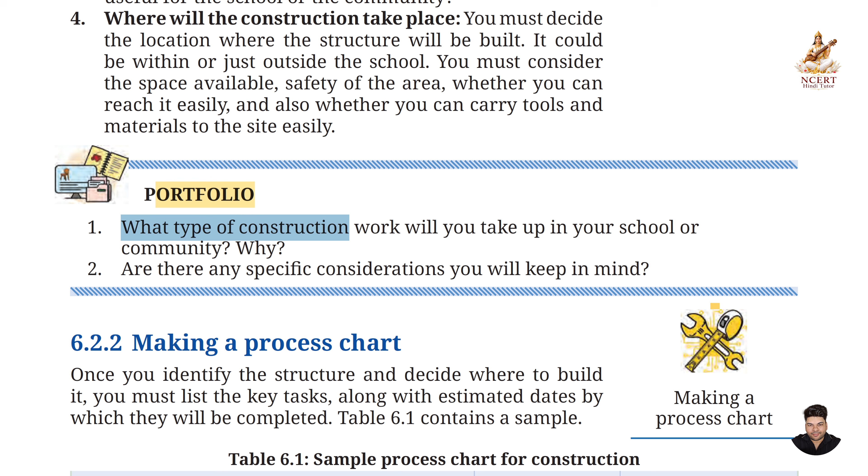Portfolio page 95, Question 1: What type of construction work will you take up in your school or community? Why? Answer: I would like to take up construction of a small boundary wall or flower bed in my school. I would choose this work because it is useful, simple, and suitable for students under the guidance of a teacher or expert.

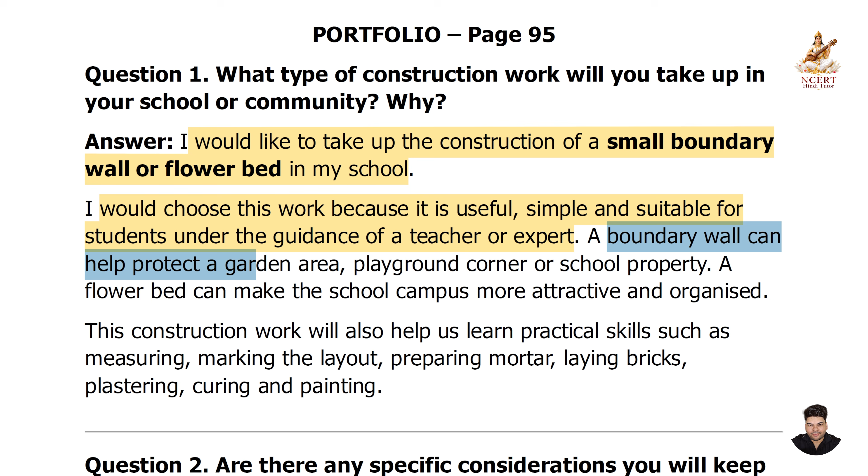A boundary wall can help protect a garden area, playground corner, or school property. A flower bed can make the school campus more attractive and organized. This construction work will also help us learn practical skills such as measuring, marking the layout, preparing mortar, laying bricks, plastering, curing, and painting.

Question 2: Are there any specific considerations you will keep in mind? Answer: Yes, I will keep the following considerations in mind.

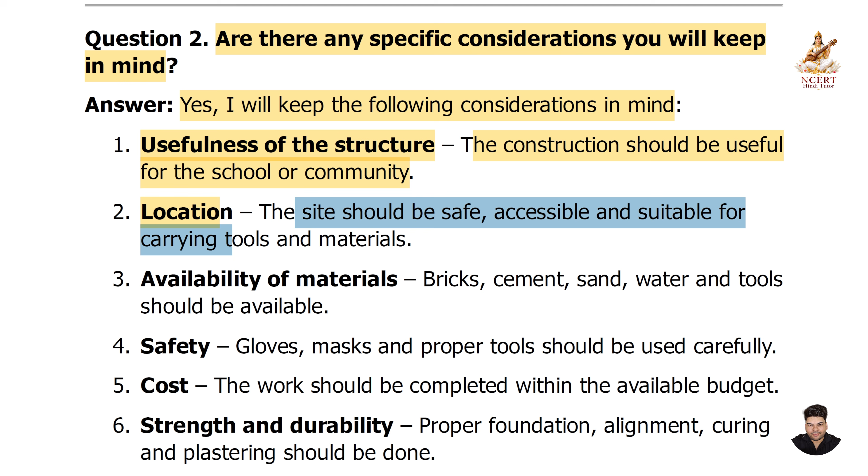First, usefulness of the structure - the construction should be useful for the school or community. Second, location - the site should be safe, accessible, and suitable for carrying tools and materials. Third, availability of materials - bricks, cement, sand, water, and tools should be available.

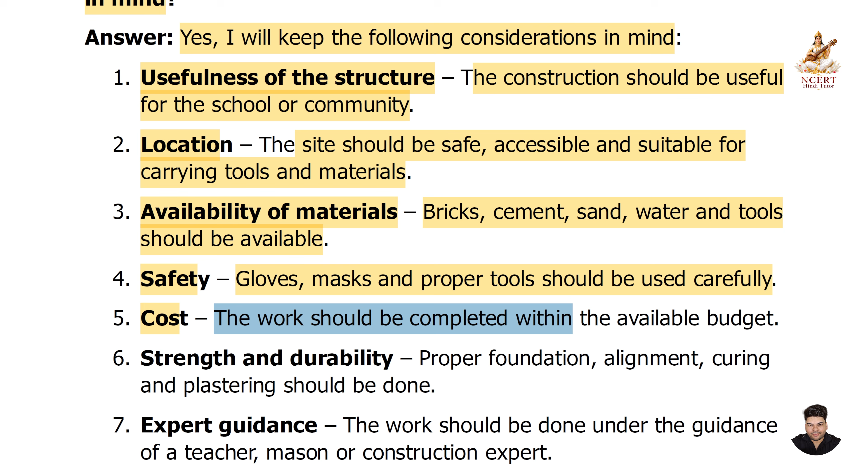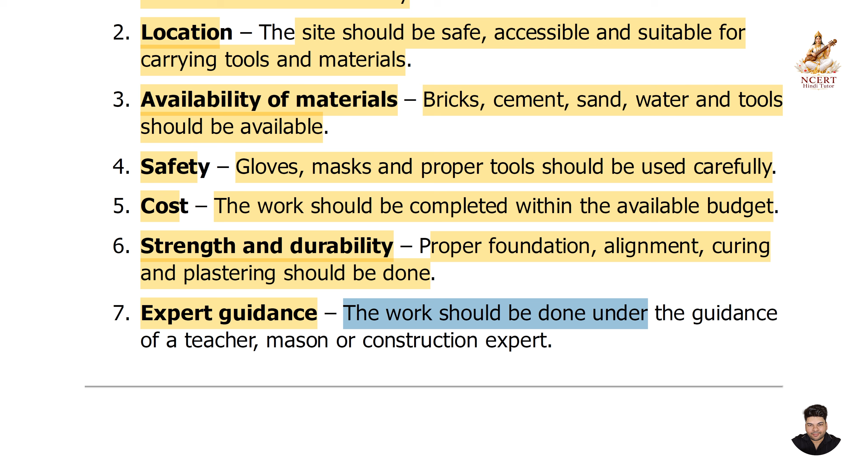Fourth, safety - gloves, masks, and proper tools should be used carefully. Fifth, cost - the work should be completed within the available budget. Sixth, strength and durability - proper foundation, alignment, curing, and plastering should be done. Seventh, expert guidance - the work should be done under the guidance of a teacher, mason, or construction expert.

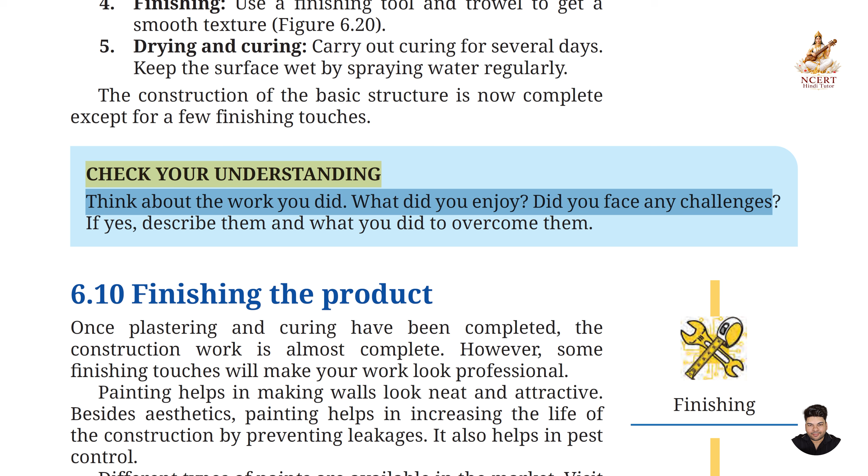Check your understanding, page 109. Think about the work you did. What did you enjoy? Did you face any challenges? If yes, describe them and what you did to overcome them.

Answer: I enjoyed learning how construction work is planned and carried out step by step. I liked measuring the site, marking the layout, mixing cement and sand, and observing how bricks are laid using mortar.

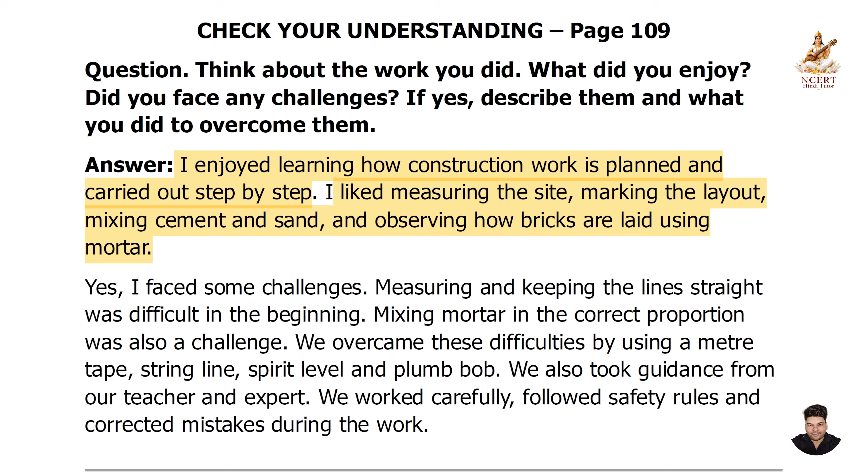Yes, I faced some challenges. Measuring and keeping the lines straight was difficult in the beginning. Mixing mortar in the correct proportion was also a challenge. We overcame these difficulties by using a meter tape, string line, spirit level, and plumb bob.

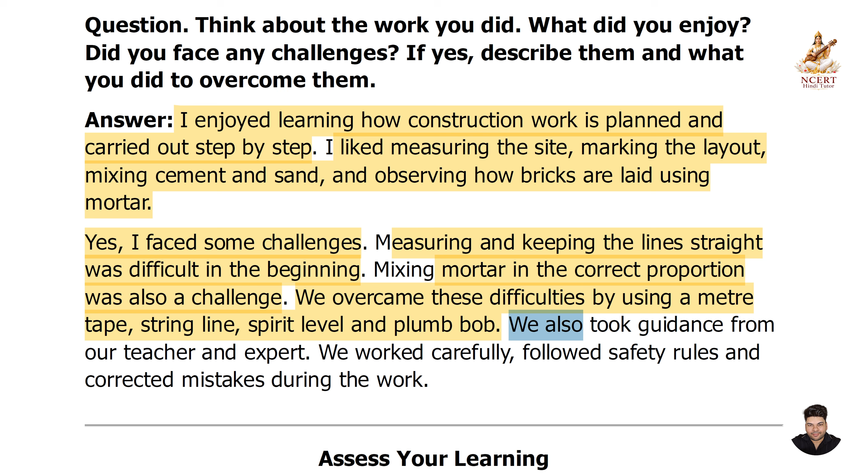We also took guidance from our teacher and expert. We worked carefully, followed safety rules, and corrected mistakes during the work.

Next, assess your learning. Question 1: Look around your school or neighborhood and identify any one structure. Identify the basic structural elements - foundation, walls, roof, beams, or columns - that you can observe and describe their functions.

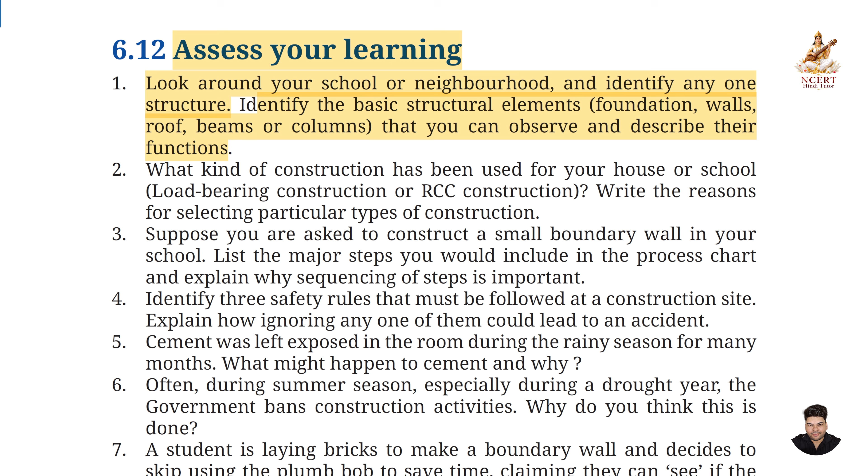Answer: One structure I can identify in my school is a classroom building. The basic structural elements are: foundation - the foundation is below the ground, it supports the whole building and transfers the load safely to the soil, and it helps prevent cracks and increases the life of the building.

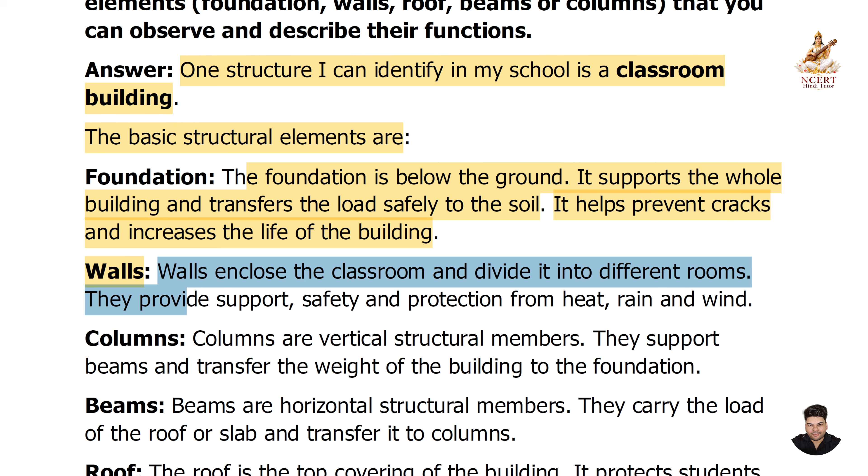Next, walls. Walls enclose the classroom and divide it into different rooms. They provide support, safety, and protection from heat, rain, and wind.

Next, columns. Columns are vertical structural members. They support beams and transfer the weight of the building to the foundation.

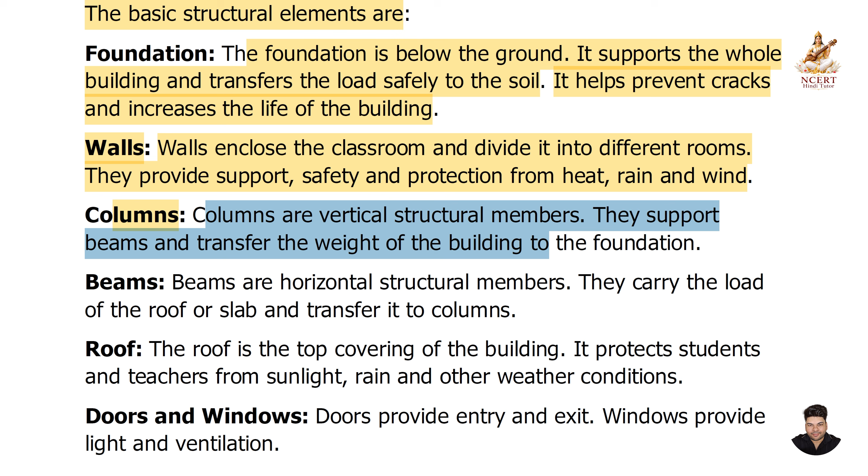Next, beams. Beams are horizontal structural members. They carry the load of the roof or slab and transfer it to columns.

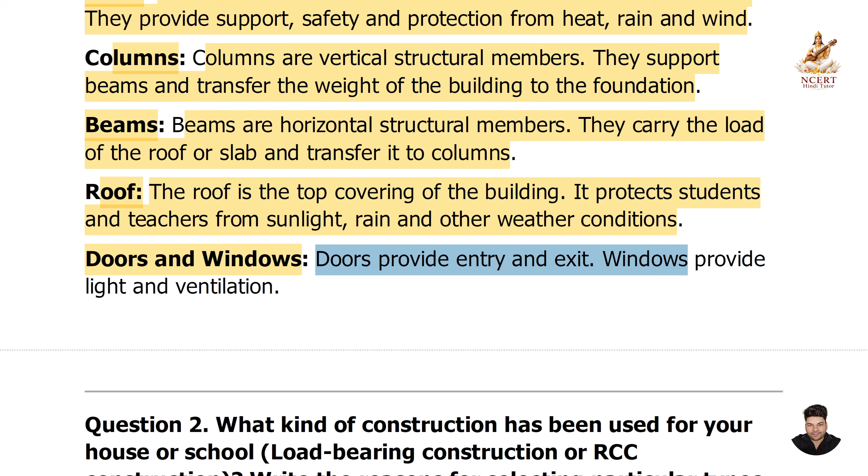Next, roof. The roof is the top covering of the building. It protects students and teachers from sunlight, rain, and other weather conditions. Doors and windows: doors provide entry and exit, windows provide light and ventilation.

Question 2: What kind of construction has been used for your house or school - load bearing construction or RCC construction? Write the reasons for selecting particular types of construction.

Answer: My school building is most likely made using RCC construction. In RCC construction, the building stands on a strong frame of columns and beams made of reinforced cement concrete. The load of the roof, slab, and upper floors is carried by the RCC frame and transferred to the foundation.

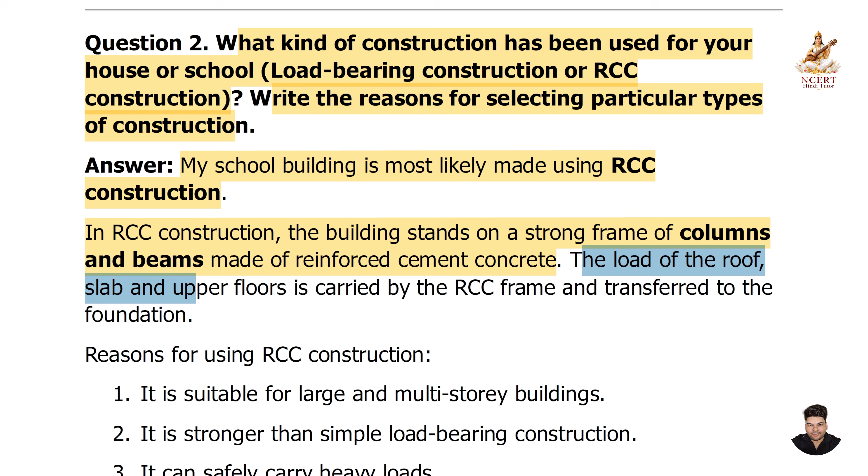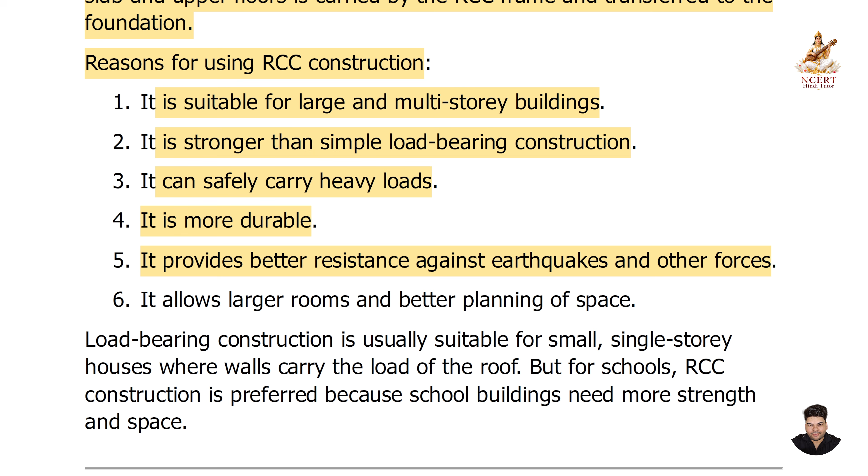Reasons for using RCC construction: it is suitable for large and multi-story buildings, it is stronger than simple load-bearing construction, it can safely carry heavy loads, it is more durable, it provides better resistance against earthquakes and other forces, and it allows larger rooms and better planning of space.

Load-bearing construction is usually suitable for small, single-story houses where walls carry the load of the roof.

But for schools, RCC construction is preferred because school buildings need more strength and space.

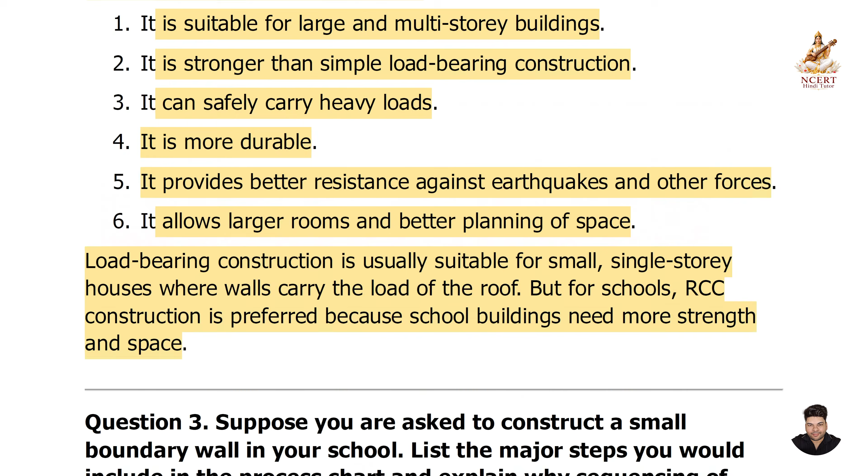Question 3: Suppose you are asked to construct a small boundary wall in your school. List the major steps you would include in the process chart and explain why sequencing of steps is important.

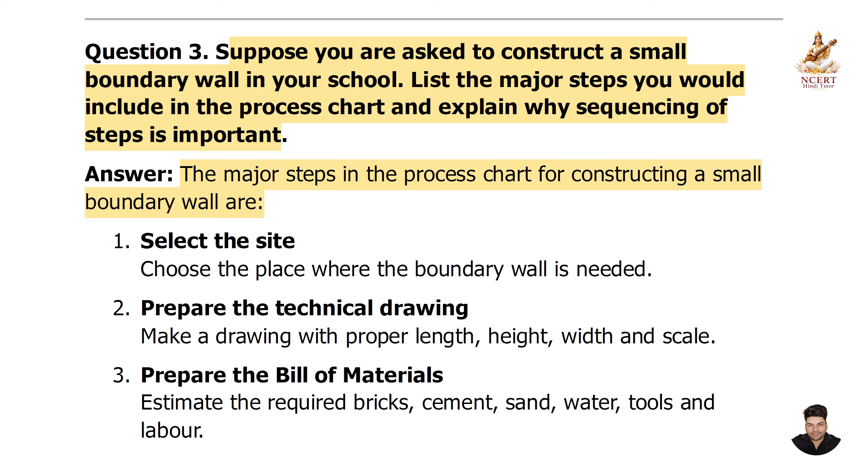Answer: The major steps in the process chart for constructing a small boundary wall are: first, select the site, choosing the place where the boundary wall is needed. Second, prepare the technical drawing, making a drawing with proper length, height, width, and scale. Third, prepare the bill of materials, estimating the required bricks, cement, sand, water, tools, and labor.

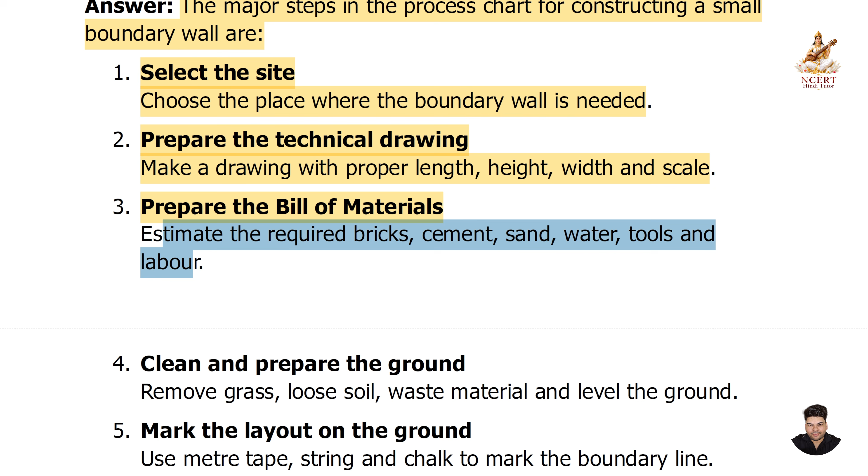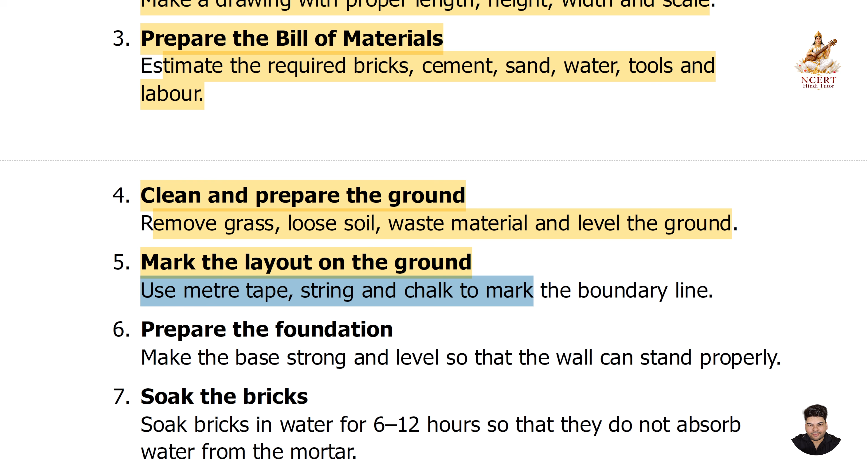Fourth, clean and prepare the ground, removing grass, loose soil, waste material, and leveling the ground. Fifth, mark the layout on the ground using meter tape, string, and chalk to mark the boundary line. Sixth, prepare the foundation, making the base strong and level so that the wall can stand properly.

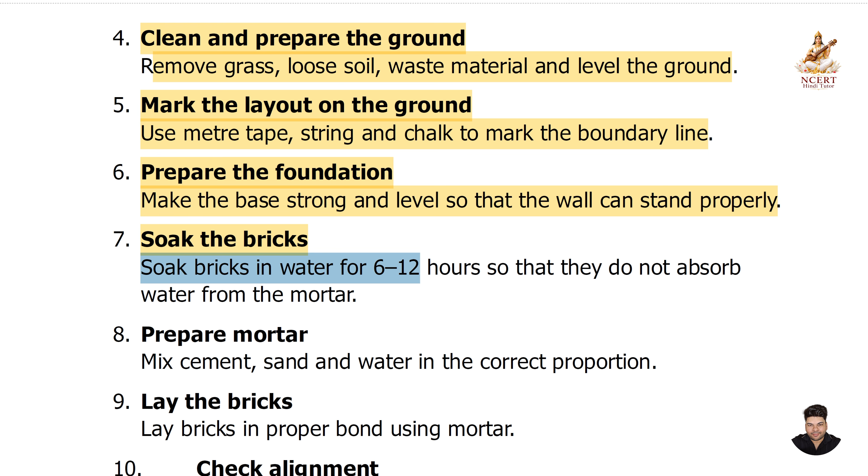Seventh, soak the bricks in water for 6 to 12 hours so that they do not absorb water from the mortar. Eighth, prepare mortar by mixing cement, sand, and water in the correct proportion.

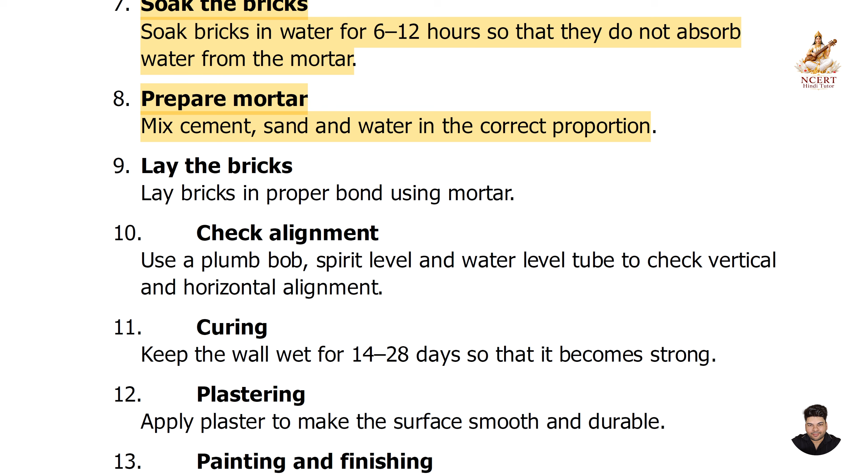Ninth, lay the bricks in proper bond using mortar. Tenth, check alignment using a plumb bob, spirit level, and water level tube to check vertical and horizontal alignment. Eleventh, curing: keep the wall wet for 14 to 28 days so that it becomes strong.

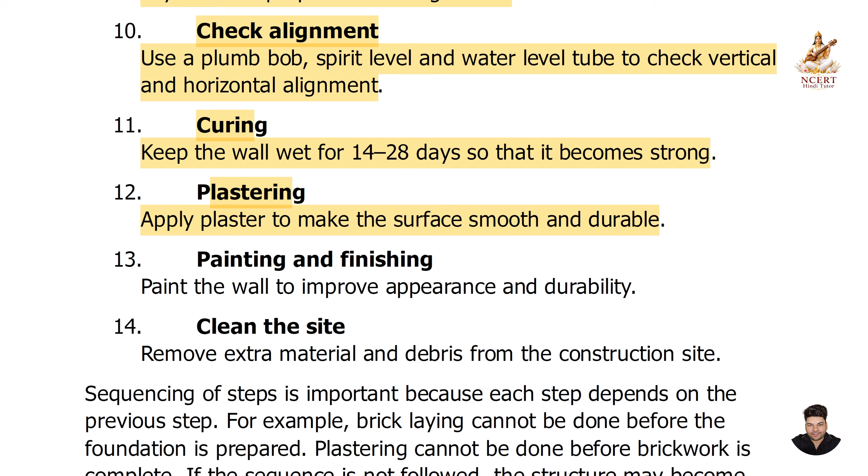Twelfth, plastering: apply plaster to make the surface smooth and durable. Thirteenth, painting and finishing: paint the wall to improve appearance and durability. Fourteenth, clean the site: remove extra material and debris from the construction site.

Sequencing of steps is important because each step depends on the previous step. For example, bricklaying cannot be done before the foundation is prepared, and plastering cannot be done before brickwork is complete. If the sequence is not followed, the construction may become weak, uneven, unsafe, or incomplete.

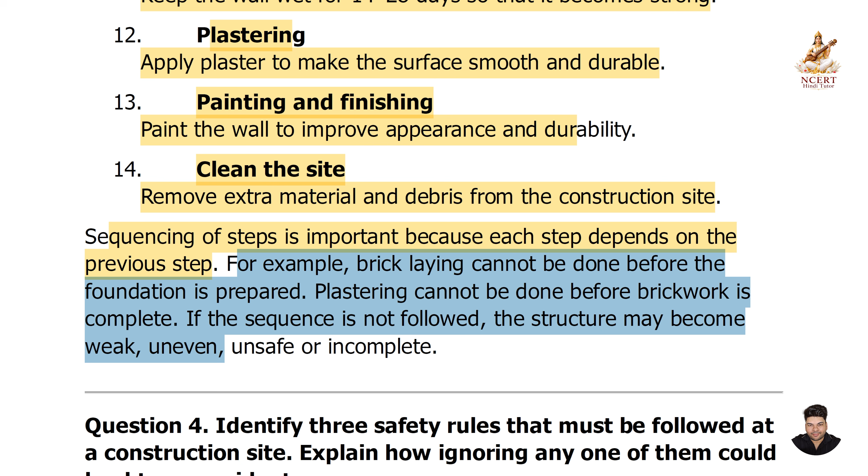Question 4: Identify 3 safety rules that must be followed at a construction site. Explain how ignoring any one of them could lead to an accident.

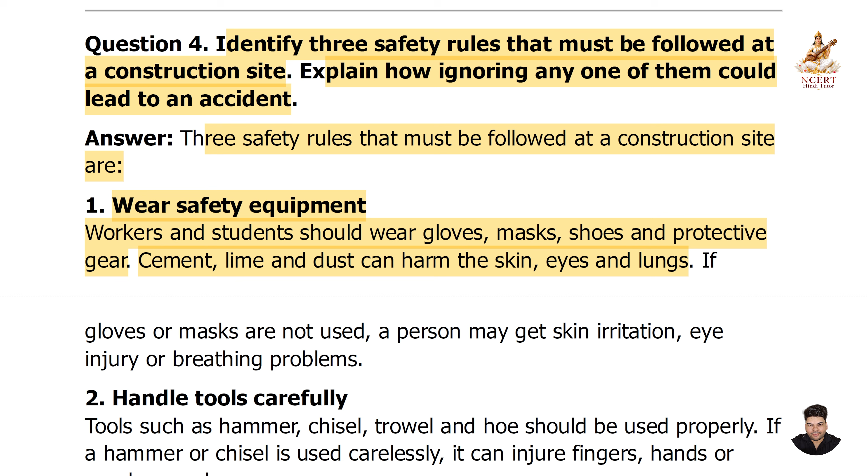Answer: The 3 safety rules that must be followed at a construction site are: first, wear safety equipment. Workers and students should wear gloves, masks, shoes, and protective gear, since cement, lime, and dust can harm the skin, eyes, and lungs. If gloves or masks are not used, a person may get skin irritation, eye injury, or breathing problems.

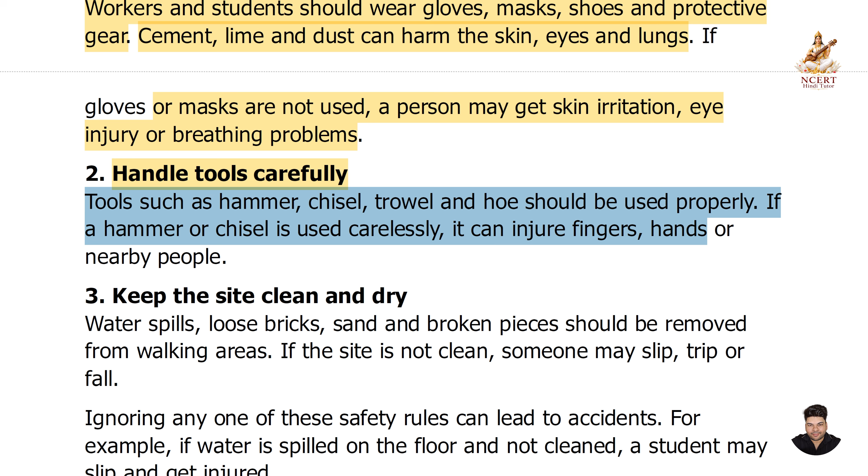Second, handle tools carefully. Tools such as hammer, chisel, trowel, and hoe should be used properly. If a hammer or chisel is used carelessly, it can injure fingers, hands, or nearby people.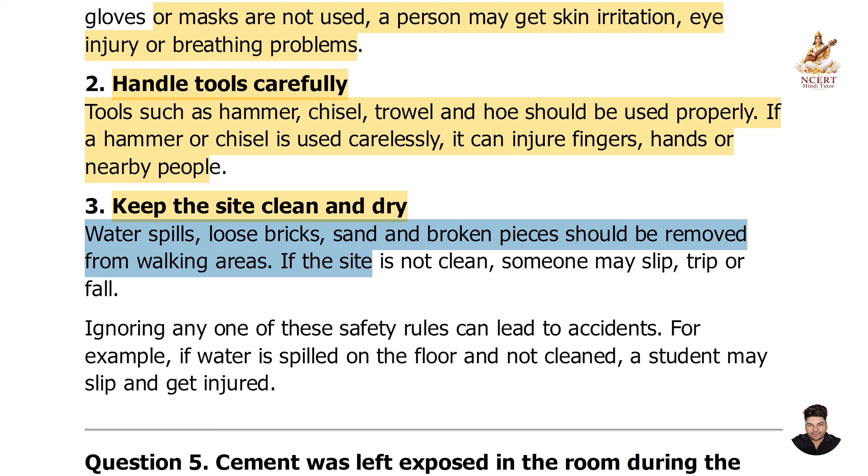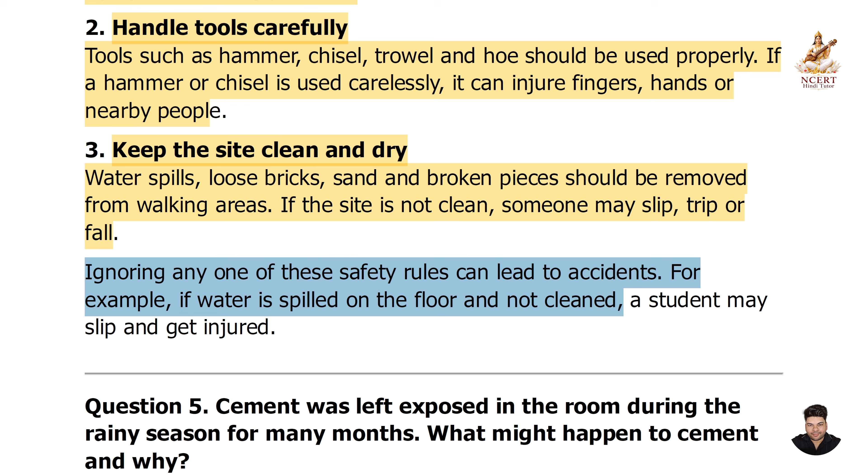Third, keep the site clean and dry. Water spills, loose bricks, sand, and broken pieces should be removed from walking areas. If the site is not clean, someone may slip, trip, or fall. Ignoring any one of these safety rules can lead to accidents. For example, if water is spilled on the floor and not cleaned, a student may slip and get injured.

Question 5: Cement was left exposed in the room during the rainy season for many months. What might happen to cement and why?

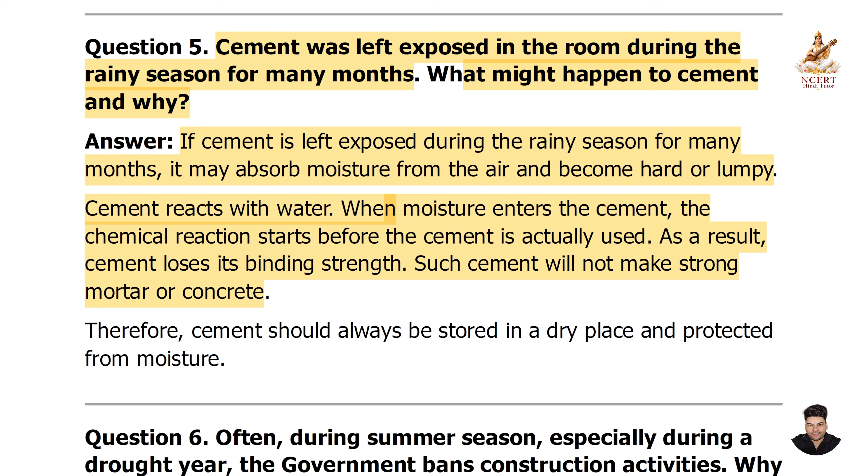Answer: If cement is left exposed during the rainy season for many months, it may absorb moisture from the air and become hard or lumpy. Cement reacts with water; when moisture enters the cement, the chemical reaction starts before the cement is actually used. As a result, cement loses its binding strength, and such cement will not make strong mortar or concrete. Therefore, cement should always be stored in a dry place and protected from moisture.

Question 6: Often during summer season, especially during a drought year, the government bans construction activities. Why do you think this is done?

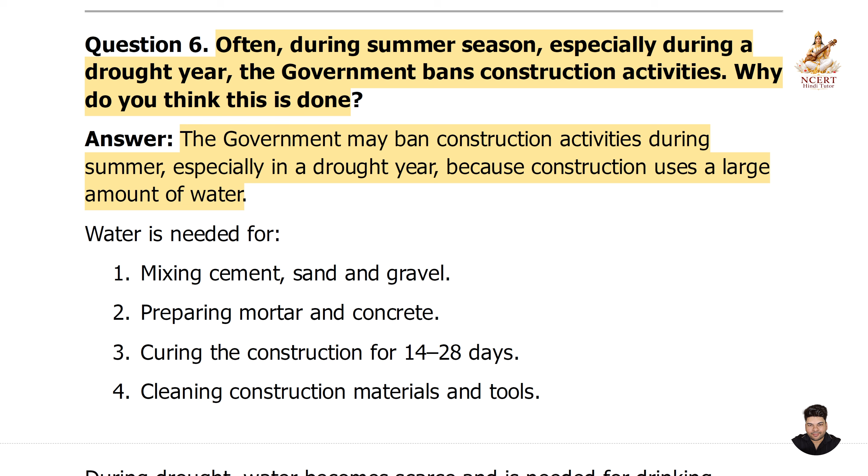Answer: The government may ban construction activities during summer, especially in a drought year, because construction uses a large amount of water. Water is needed for mixing cement, sand, and gravel; preparing mortar and concrete; curing the construction for 14 to 28 days; and cleaning construction materials and tools.

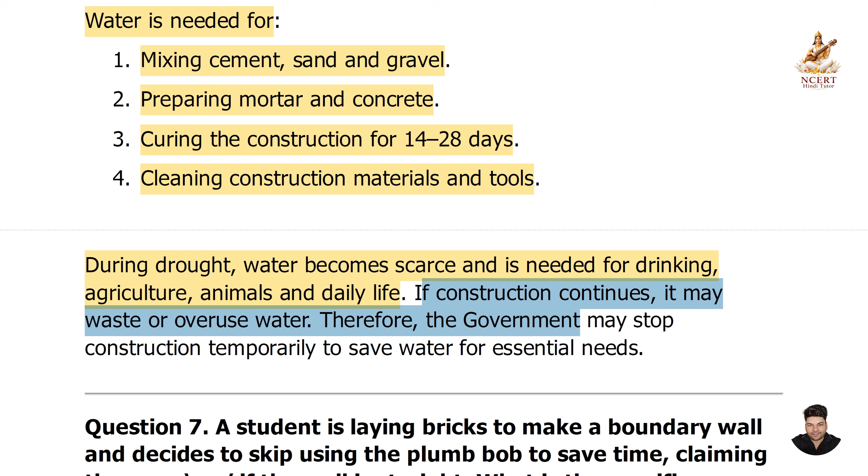During drought, water becomes scarce and is needed for drinking, agriculture, animals, and daily life. If construction continues, it may waste or overuse water. Therefore, the government may stop construction temporarily to save water for essential needs.

Question 7. A student is laying bricks to make a boundary wall and decides to skip using the plumb bob to save time, claiming they can see if the wall is straight. What is the specific technical risk of relying on visual estimation instead of a plumb bob? If the wall is even slightly out of plumb, not perfectly vertical, how might this affect the building's safety over the years?

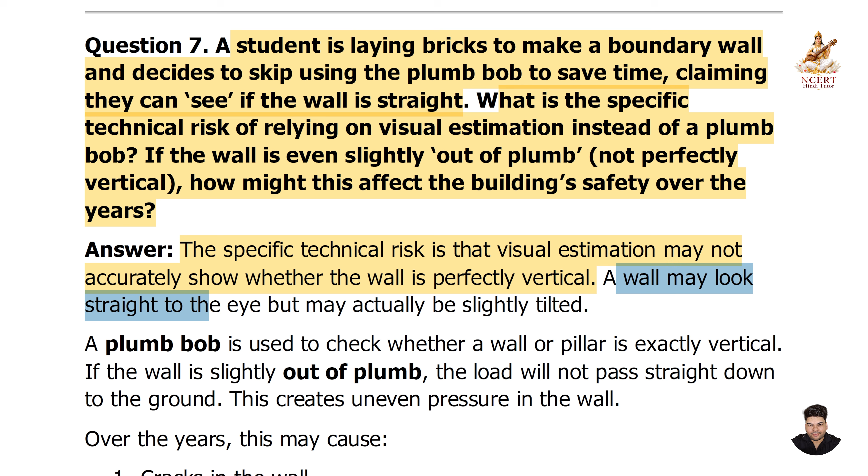Answer: the specific technical risk is that visual estimation may not accurately show whether the wall is perfectly vertical. A wall may look straight to the eye but may actually be slightly tilted. A plumb bob is used to check whether a wall or pillar is exactly vertical.

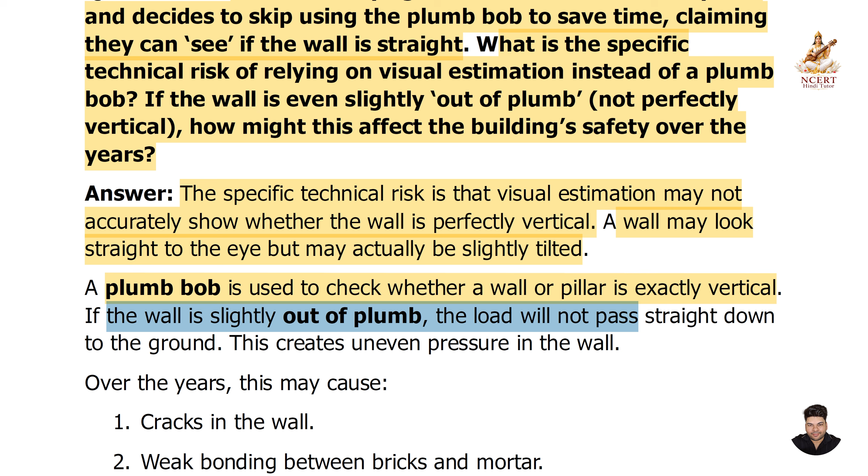If the wall is slightly out of plumb, the load will not pass straight down to the ground. This creates uneven pressure in the wall. Over the years, this may cause cracks in the wall, weak bonding between bricks and mortar, leaning of the wall, reduced stability of the structure, and risk of collapse during heavy rain, wind, or vibration. Therefore, using a plumb bob is important for accuracy, strength, and safety.

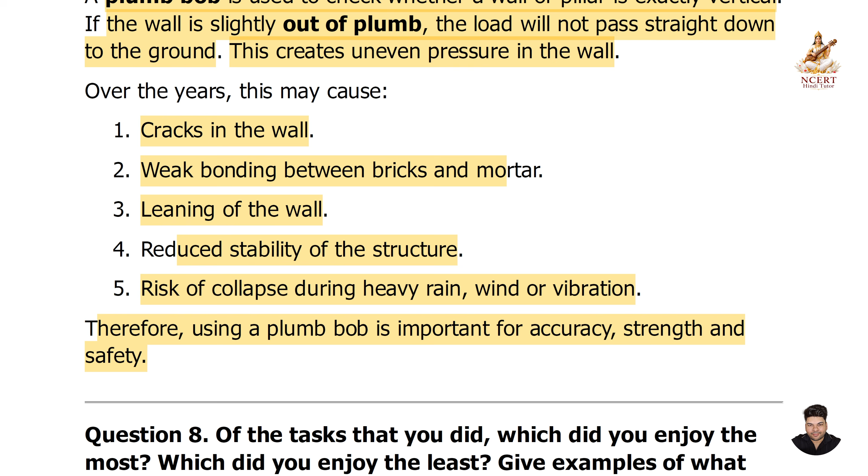Question 8. Of the tasks that you did, which did you enjoy the most? Which did you enjoy the least? Give examples of what went well and what did not go well. What would you do differently next time?

Answer: I enjoyed marking the layout and laying bricks the most because these activities helped me understand how a structure begins to take shape. I also liked using tools like the metre tape, string line, and trowel. I enjoyed mixing mortar the least because it required the correct proportion of cement, sand, and water.

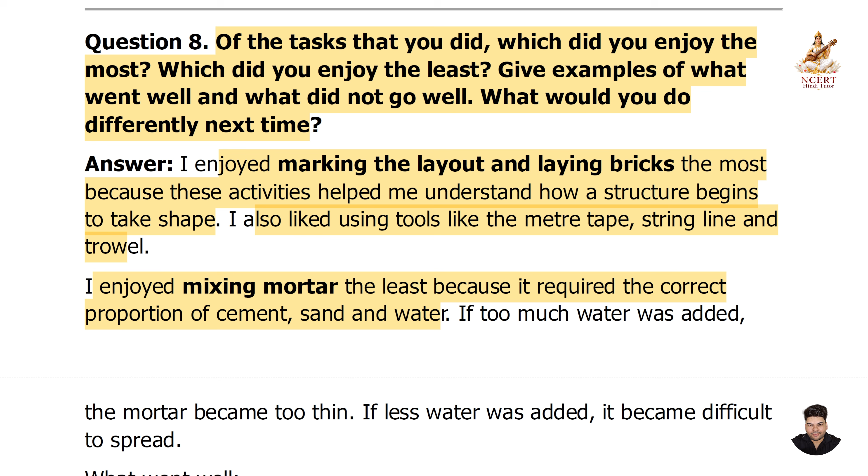If too much water was added, the mortar became too thin. If less water was added, it became difficult to spread.

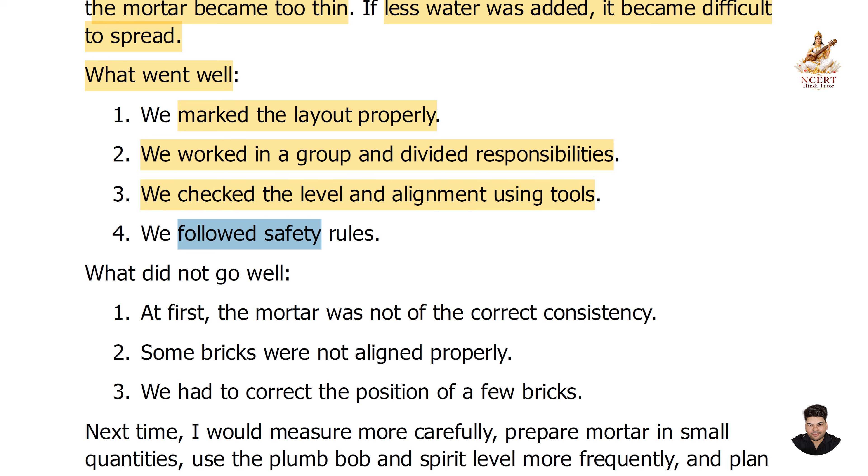What went well? We marked the layout properly. We worked in a group and divided responsibilities. We checked the level and alignment using tools. We followed safety rules.

What did not go well? At first, the mortar was not of the correct consistency. Some bricks were not aligned properly. We had to correct the position of a few bricks.

Next time, I would measure more carefully, prepare mortar in small quantities, use the plumb bob and spirit level more frequently, and plan the work better before starting.

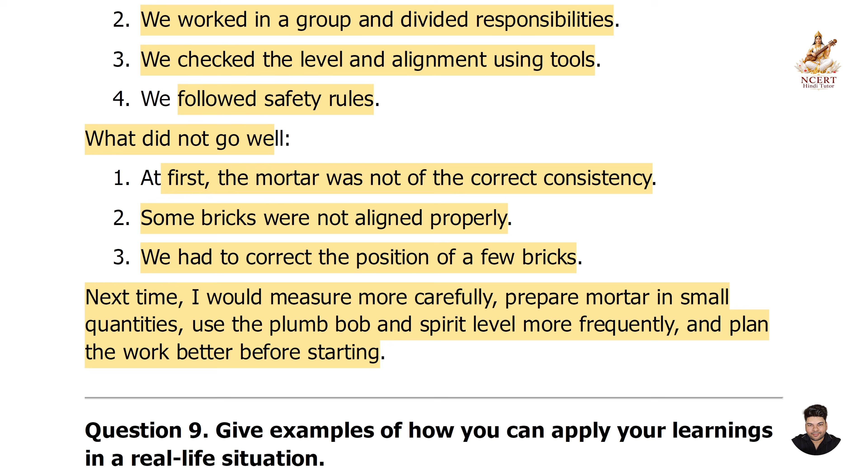Question 9. Give examples of how you can apply your learnings in a real life situation. Answer: I can apply my learnings from this chapter in many real life situations. First, minor repair work at home. I can help identify cracks, broken tiles, or damaged plaster and understand how mortar is used for repair.

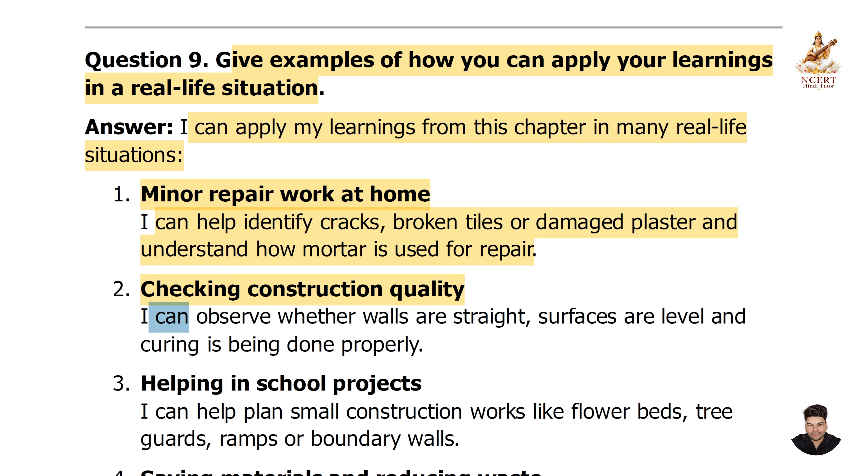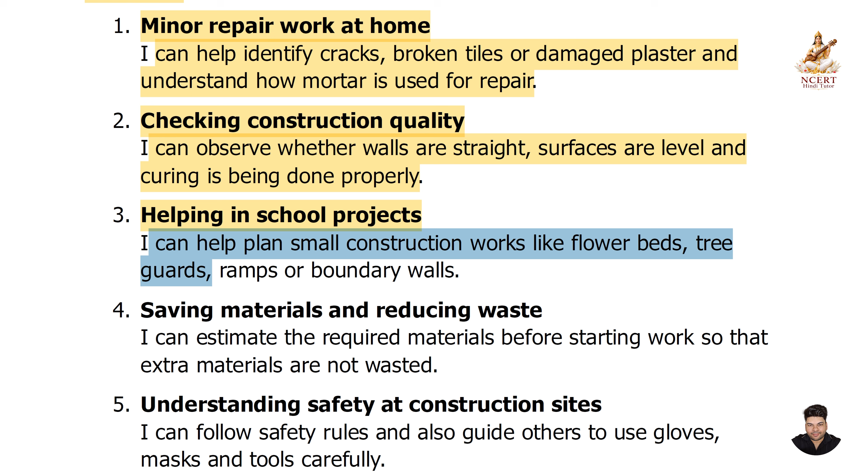Second, checking construction quality. I can observe whether walls are straight, surfaces are level, and curing is being done properly. Third, helping in school projects. I can help plan small construction works like flower beds, tree guards, ramps, or boundary walls.

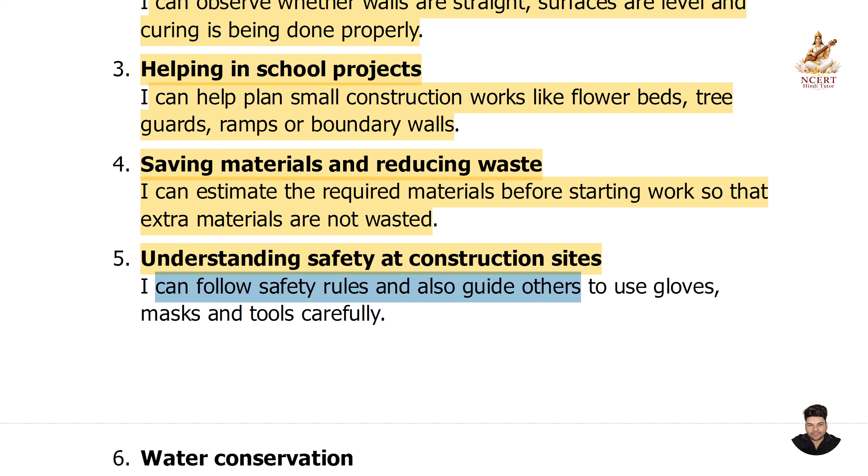Fourth, saving materials and reducing waste. I can estimate the required materials before starting work so that extra materials are not wasted. Fifth, understanding safety at construction sites. I can follow safety rules and also guide others to use gloves, masks, and tools carefully.

Sixth, water conservation. I can understand why construction needs water and why water should not be wasted, especially during summer or drought. Seventh, future career awareness. This learning can help me understand careers such as mason, civil engineer, architect, contractor, or site supervisor. Thus, the chapter helps us understand construction as a useful practical skill for school, home, and community life.

So friends, we have completed question answers of chapter 6, construction.